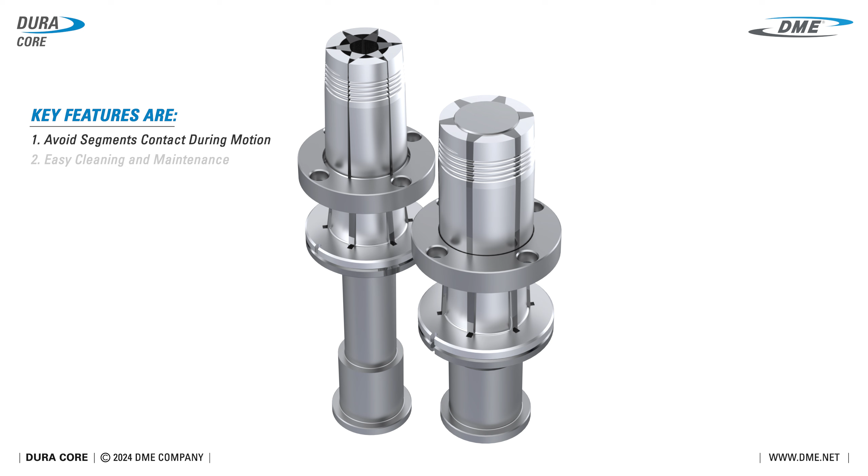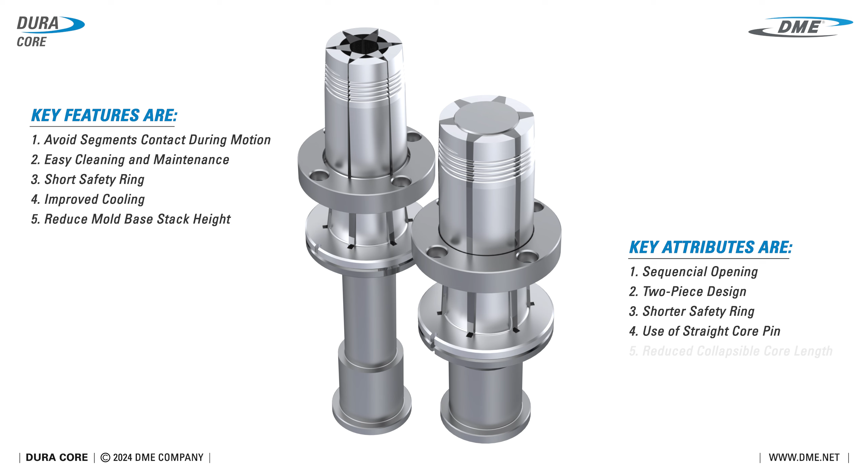Key features are: avoid segment contact during motion, easy cleaning and maintenance, shorter safety ring, improved cooling, and reduced mold base stack height. Key attributes are: sequential opening, two-piece design, shorter safety ring, use of a straight core pin, and reduced collapsible core length.

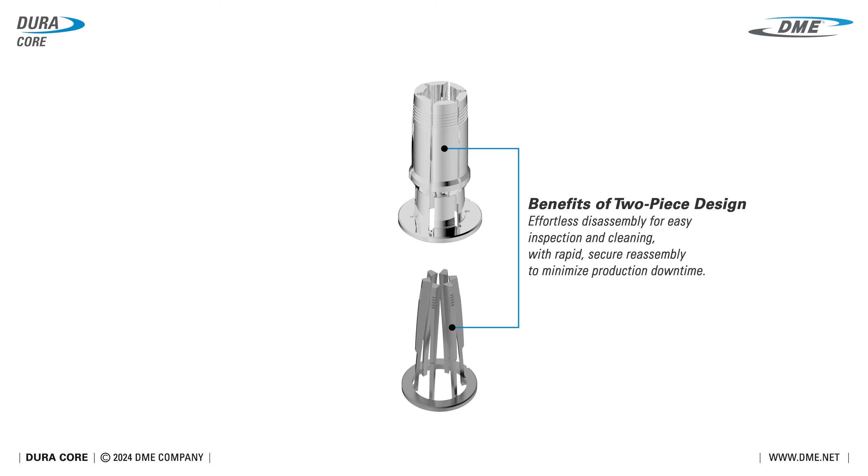Benefits of the two-piece design: effortless disassembly for easy inspection and cleaning, with rapid, secure reassembly to minimize production downtime.

Enhanced safety is achieved through a shorter safety ring mounted securely on a safety plate.

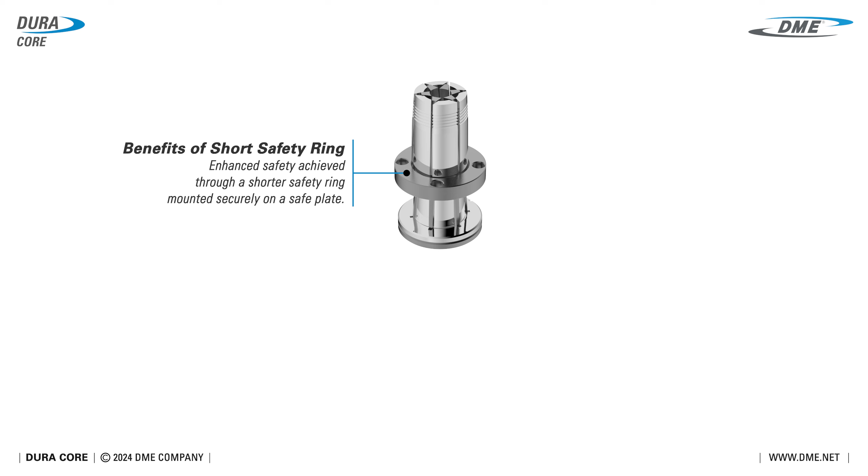Optimize manufacturing and cooling efficiency with a straight core pin, leading to improved overall performance.

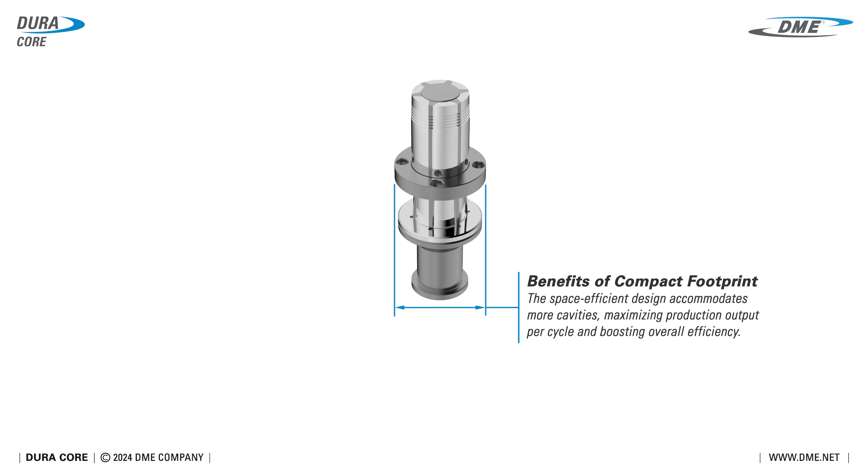Realize space-saving advantages with a reduced collapsible core length, effectively minimizing the mold base stack height. This space-efficient design accommodates more cavities, maximizing production output per cycle and boosting overall efficiency.

Dura Cores are available in round head or flush head forms.

Dura Core advantages: during the mold closing phase, the large segments smoothly pave the way, allowing the small segments to follow suit. Small segments follow the large segments without contact, ensuring no additional load on the small segments during the mold closing phase.

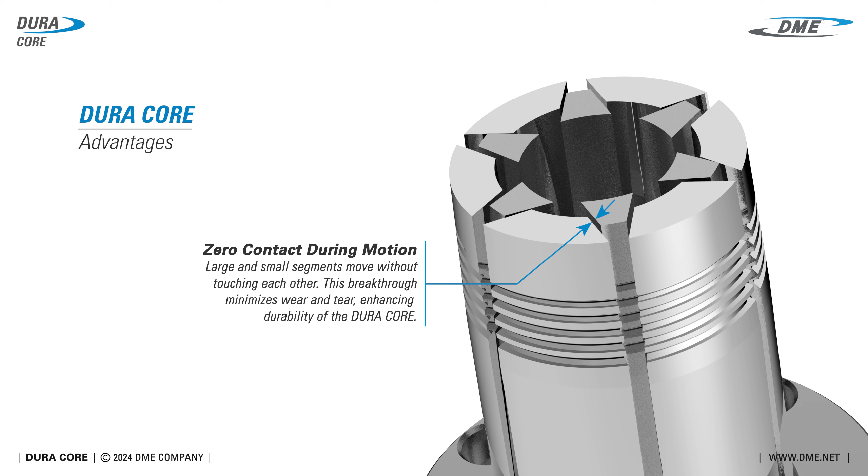Large and small segments move without touching each other. This breakthrough minimizes wear and tear, enhancing the durability of the Dura Core.